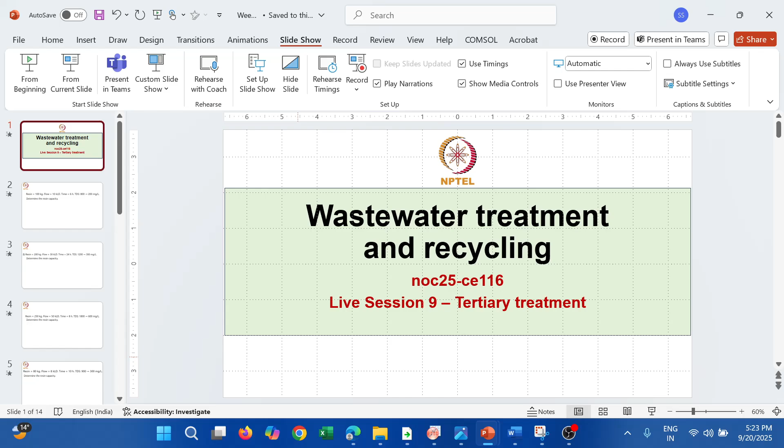I will show very similar problems but with different numbers, so it will be easy for you to solve. Okay, let's move to the problem. Is my screen visible? Can someone respond? Okay, I think it's visible.

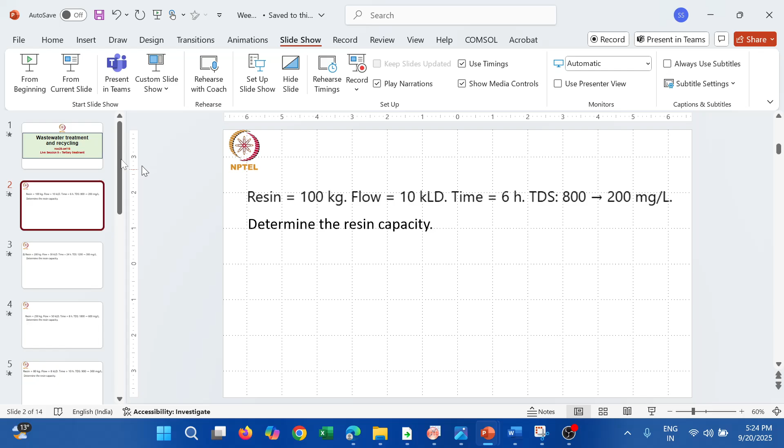So the first type of problem involves an ion exchange resin. The weight of the resin is given. Let's write the given data first: equal to 100 kg, and then we have the flow equal to 10 kL, and time of operation equal to 6 hours.

Then the TDS removed is equal to 800 minus 200 mg per liter, which is basically 600 mg per liter. Okay, so now resin capacity.

What is meant by resin capacity? Resin capacity is nothing but your weight of pollutant removed divided by the weight of the resin.

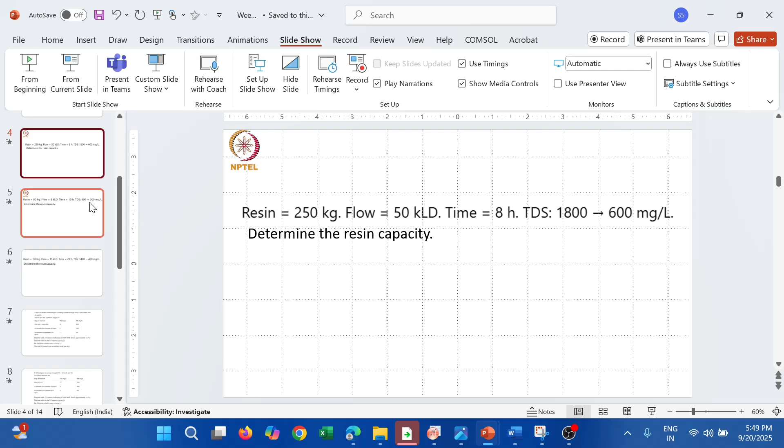It's easy only. I have two more very similar problems we can solve, so that for you it is very same problem but with different numericals, like the three problems similar to each other. We can solve that so your assignment problems will be very easy for you. There are only two problems in the assignment, one is of this type and the other is of some other type.

So this one you try to solve. Is my screen visible? Yeah, this is visible. Okay, so the resin weight is 80 kg, flow is 8 KLD, time is 10 hours, TDS removed is 600 mg per liter. We have to find the resin capacity.

Okay, so it's very similar. Okay okay, I can do it. Okay, I'll wait, I'll also solve it meanwhile, but I will wait too. Okay ma'am, sure, sure.

Six hundred. This is mg. Ma'am, this is 0.025. Divided by 80, exactly. I'm also getting the same answer. So resin capacity is equal to 2 by 80, which is equal to 0.025 gram of TDS per gram of resin.

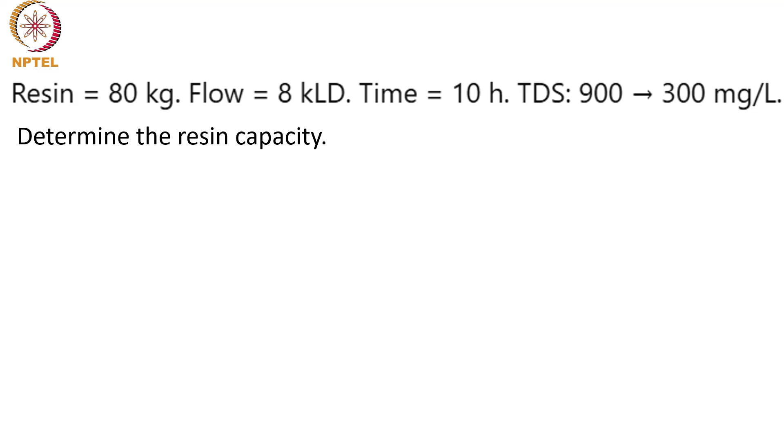Now we will move to one more problem that we can solve. Now it is becoming easy. That time my conversion of unit was wrong, I converted mg from kg by dividing it by 1000. It's okay, it's okay.

Now this problem we can solve together. Resin weight is equal to 120 kg. Volume of water equal to 15 KLD, 15 into 10 to the power 3 into 20 divided by 24, is equal to 12,500. Weight equal to 1000 into 12.5, so 12,500, so this and this will get cancelled. So 12.5 kg is TDS weight.

So resin capacity is 12.5 kg, so 12.5 by 120. 12.5 divided by 120 is 0.104. I'm also getting the same. Excellent, so this problem is solved.

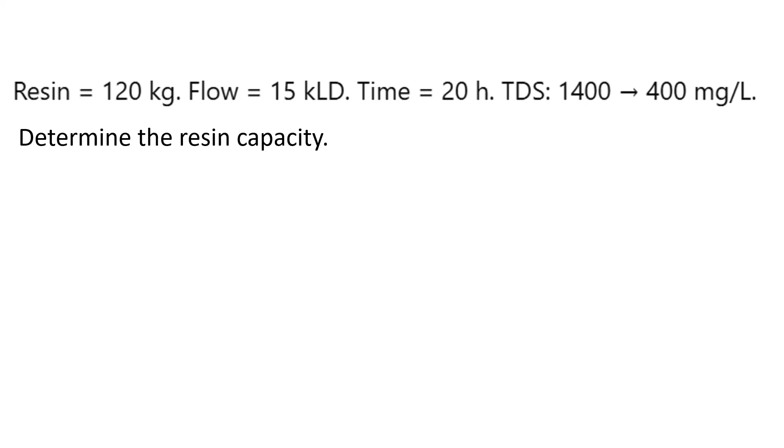So ma'am, this type is solved. Apart from this, one more type is present, it is basically an aptitude type question. It's easy only, we can solve. I have three problems similar to that, so we can solve those problems. One second, I'll have some water.

A 300 KLD effluent treatment plant is treating its water through sand plus carbon filter, then with UF and RO. The TSS and TDS at different stages are given. So if we see in this problem, we have three treatment units: this is the carbon sand filter, the next is the UF.

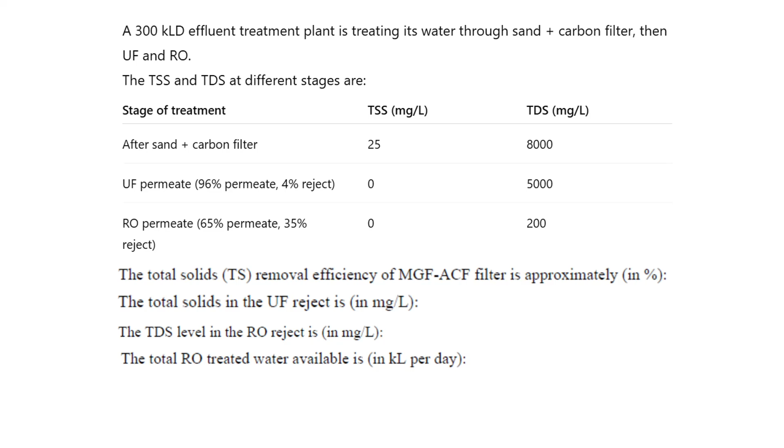Are you making some sketches, ma'am? Is it visible? Your screen is visible, but it's showing the problem statement only. Oh, my iPad should be visible. Ma'am, can you allow me 1 minute? Yeah, sure, just a minute. Yeah, sorry, no problem. So is my iPad visible now? Yeah, okay.

So we have this carbon sand filter, then we have our ultrafiltration unit, in which we have permeate and reject. Maybe we can keep this as reject, and then we have our permeate, which will be entering our RO unit.

At this stage, TSS equal to 25 mg per liter, TDS equal to 8000 mg per liter. At this stage, the TSS is completely removed, it's 0, and the TDS is equal to 5000 mg per liter, and here we have the reject and permeate, and then here we have our TSS equal to 0 and TDS equal to 200 mg per liter. So this is the given data, now we have to...

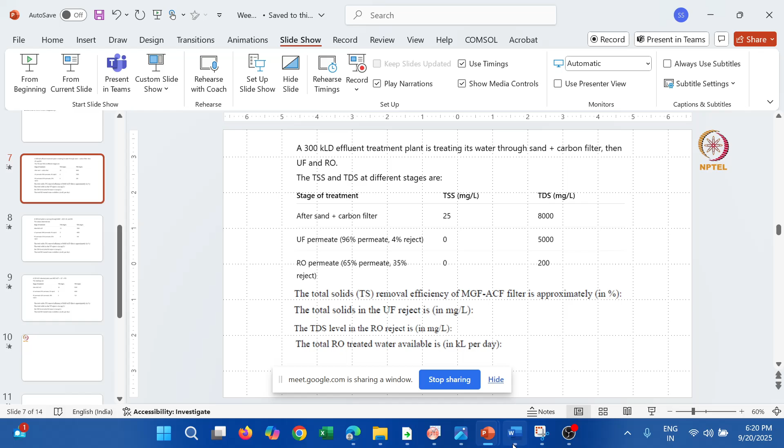Or shall I post the question in the message as a snipping shot? Yeah, sure. I'm not able to paste the question. Is now the screen visible, right? Yeah, yeah, yeah, ma'am, okay. You can see it, and then tell me if you have any doubts.

300, 10,000, 200, total solids. These are possible to do. Yeah, but the percentage of rejects and all, okay, it is there. Okay, ma'am, no issue, okay.

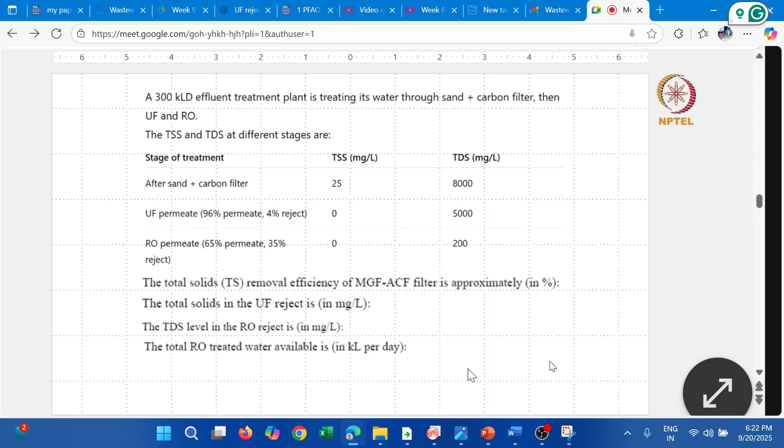So now we will move to the next question. Yes, it is very similar to this question. I will give the data, what is entering into the carbon filter, so that we can just solve this question also. Okay, I will just type it.

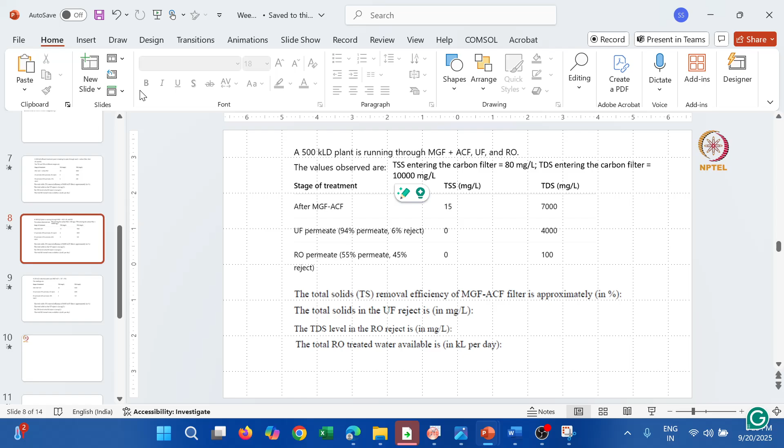I will solve, you see it, and then the next problem you can solve. Okay, but I can do, ma'am. Okay, okay, okay, I will also do simultaneously. Okay, yeah, yeah.

But 94 percentage, yes, that is 55 percentage. This is 55 percentage. Total solid amount, total solid, total RO water. Total RO water, that means MGF is coming this much.

500 KLD. So 500 KLD. So 500 into 0.94 into 0.55 is 258.5. So the last answer is, ma'am, 258.5 KLD.

Okay, okay, I am doing from the first subdivision. Okay, we will see, we will discuss the answer. Okay, yeah, once sure, I'm sure, solving, we will discuss the answer. Yeah.

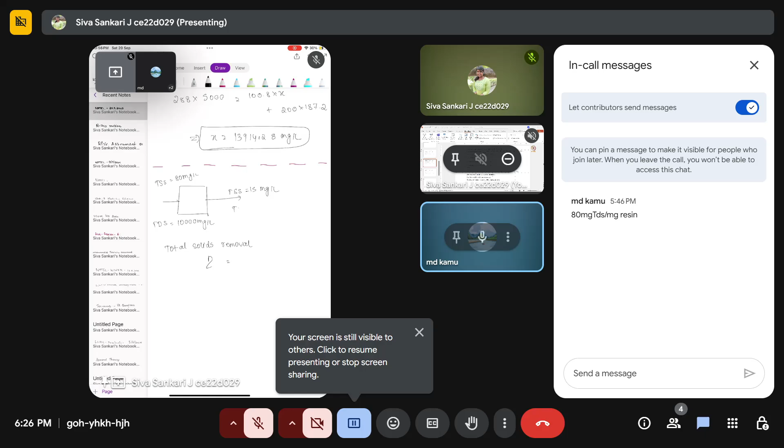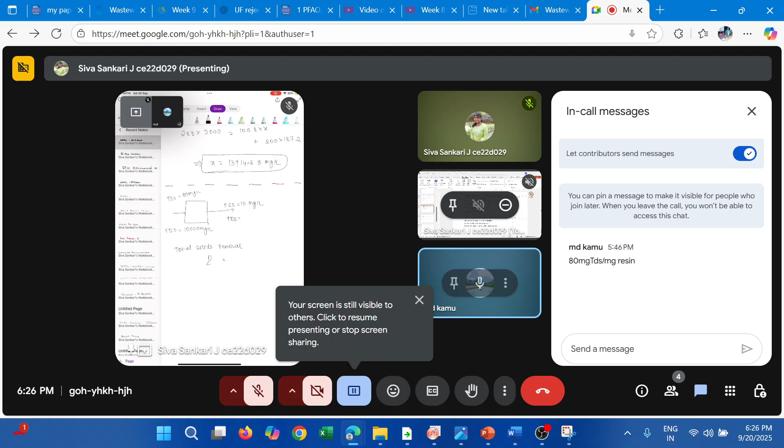Where can I get this data that this TSS is 15 mg per liter and TDS? Okay, okay, I will share the screen. Okay. Is my screen visible now? Oh, okay, okay, okay, TSS 15 and TDS is 7,000, okay.

Mg per liter. No, yeah, that's okay. This TSS is 0 mg per liter and TDS is equal to 4,000. TSS equal to 0 and TDS equal to 100. I've got all these things. So TS removed by MGF percentage. TSS equal to 500 into 80.

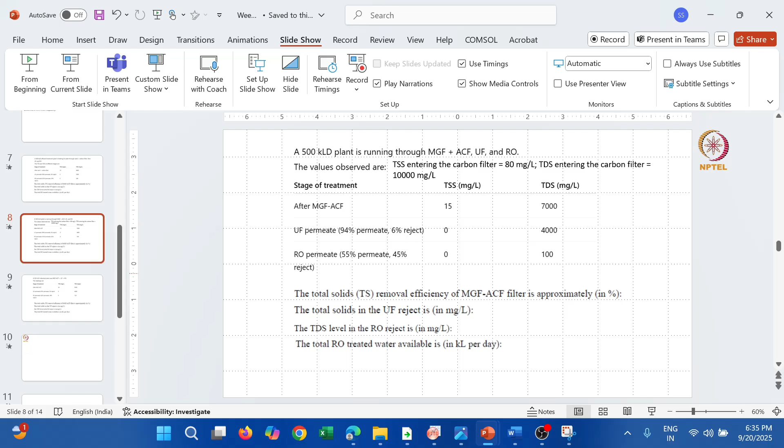This TDS, can you go to the problem statement? Yeah sure, oh it's 7,000. Okay, I'm sorry, yeah. Then you should be correct, yeah it should be, this should be this much. Okay, yeah, this should be 7, right?

Okay, so for next one, are you getting total solids as 54250? Yeah, 54250. Okay, then for third subdivision, is it 8,000?

766.67. Yeah, exactly. And then for the last one, it is point 258.5. Yeah, okay, so that's it.

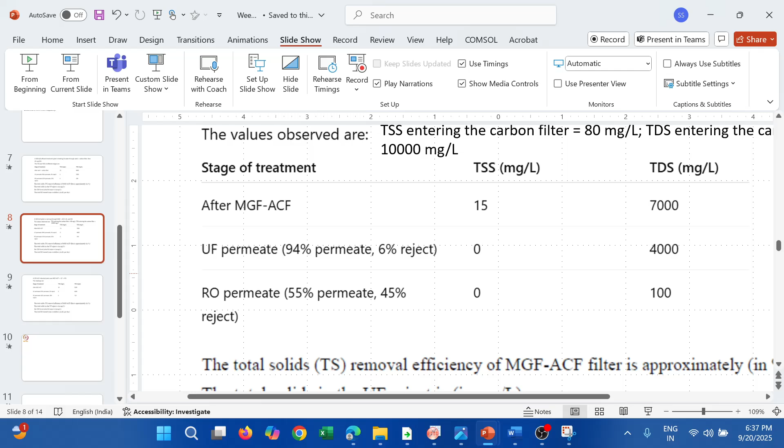Yeah, so these two types of problems were there in the assignment problems. We have one more problem very similar to this, if you want we can solve it. Yeah, we can, sure.

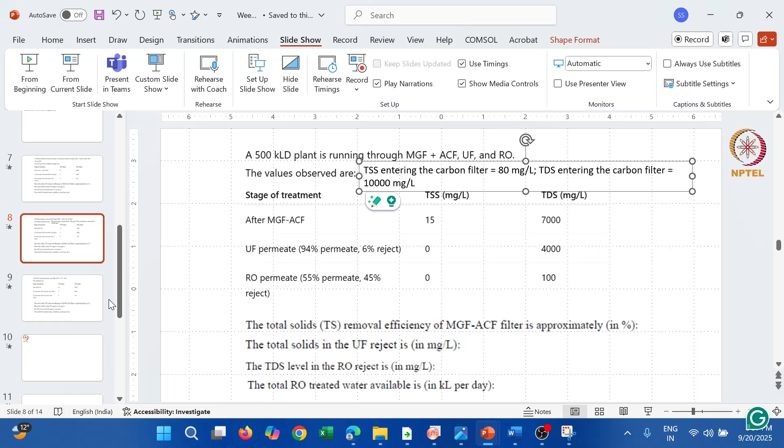I will just give the inlet concentrations for the carbon filter and then we can solve and discuss the answer similar to this. Okay sure ma'am. So 70, we can keep it as 200 and then this one as 12,000. Then, one second.

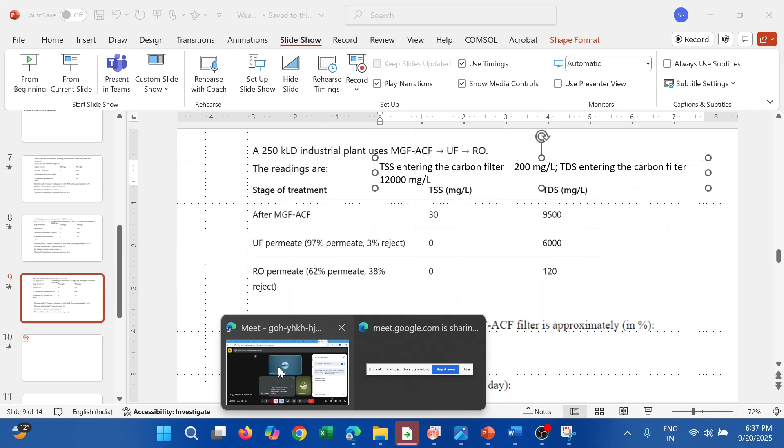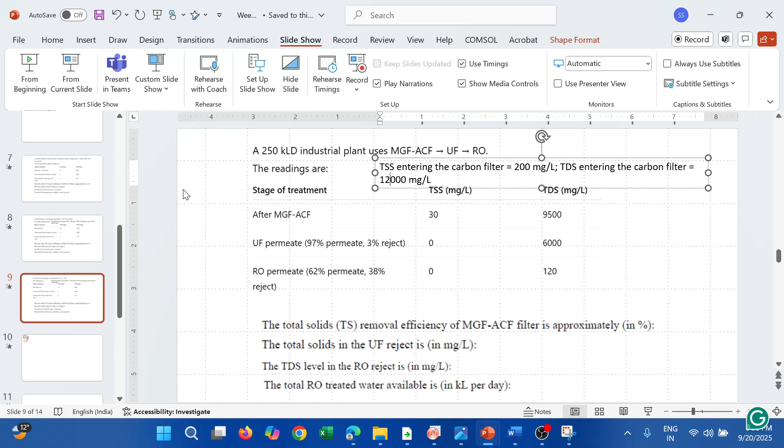This is 250 KLD. So this is carbon filter, TSS 200, TDS.

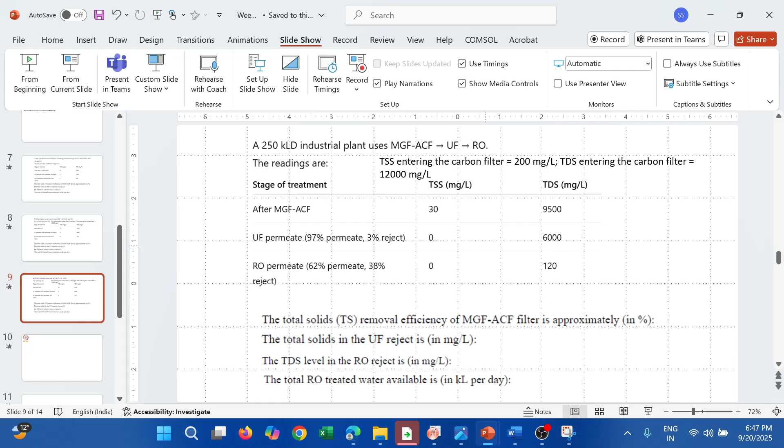Kanu, did you complete it? Yeah ma'am. Okay, shall we discuss the answer? Yeah sure, for the first one, is it 21%?

21.89%. Yeah okay, amazing. For second one, is it 123,666.67 mg per liter? Yeah, 123,666.67, yeah exactly.

For third one, 15541.8 mg per liter. I have got 15593.68. Okay, yeah, I think it's close by, maybe I might have made some calculation mistake, that should not be a problem.

And for the last one, it is 150 kl, 0.35. Ah okay yeah, yeah I have approximated to 150. Yeah, you have taken point five. Yeah, so that's why we might have got different answers.